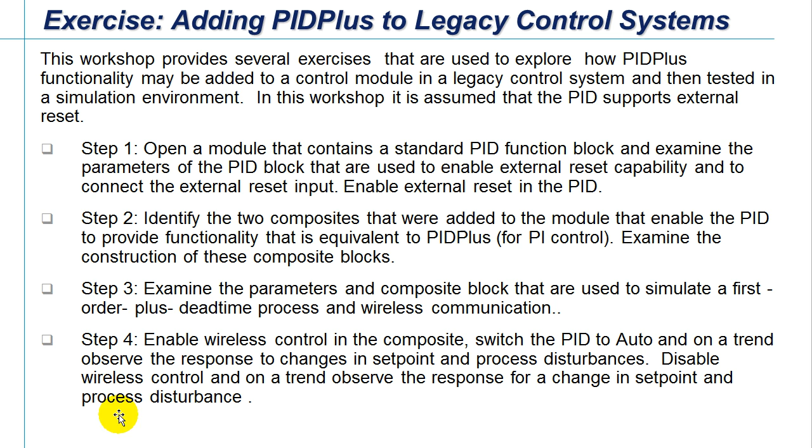In the first part of this exercise, we'll look at a module that contains our traditional PID for single loop control. We'll then identify the composites that are needed to be added to the control module to provide PIDPlus capability. We'll then examine some composite blocks that are used to simulate the process so that we can test this. And then we'll enable wireless control and introduce both set point and disturbance changes to demonstrate the control using PIDPlus implemented in this way.

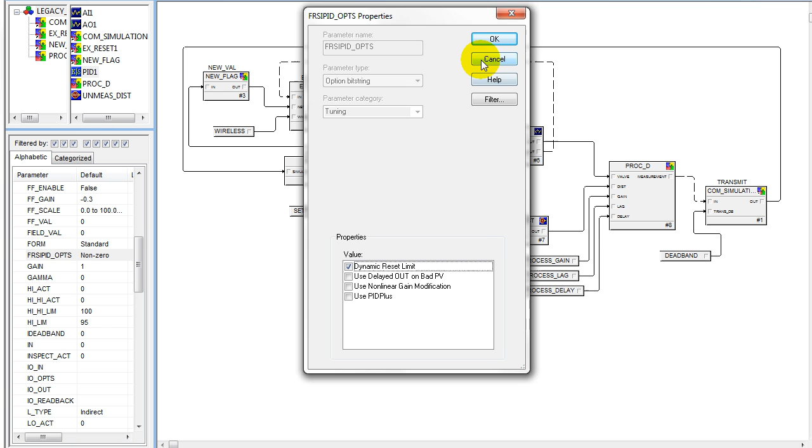Here is the module that we'll be using. As you notice, we have an input-output and a traditional PID in the control module. The input, though, in this case is being provided by a wireless transmitter. We're simulating that wireless measurement to demonstrate wireless control. The PID in this case is set up where there's a parameter called dynamic reset limiting, which is used to enable external reset. And so in this case we've enabled external reset, and the input coming in on BKCAL_IN then is used in the positive feedback network that is used to calculate the reset component.

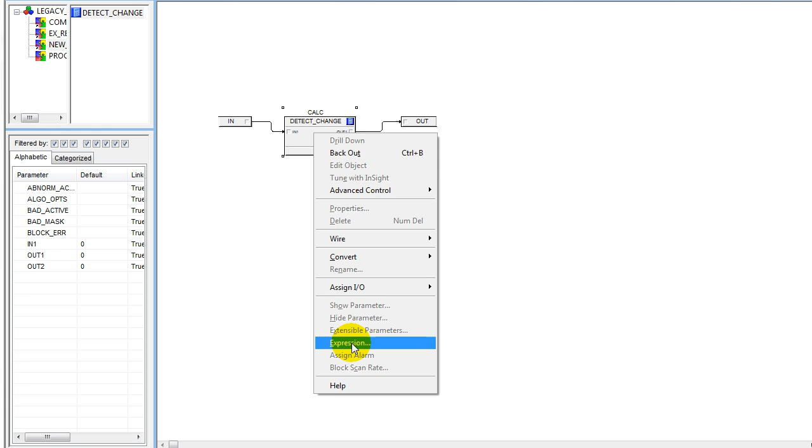The implementation of PIDPlus are two composites. The first is used to just detect a change in the wireless measurement, and so you see here that we're providing an output of 0, 1 based upon whether a new measurement has been received. That new measurement flag is then used in a second composite that is acting upon the normal input that would be provided to the BKCAL_IN.

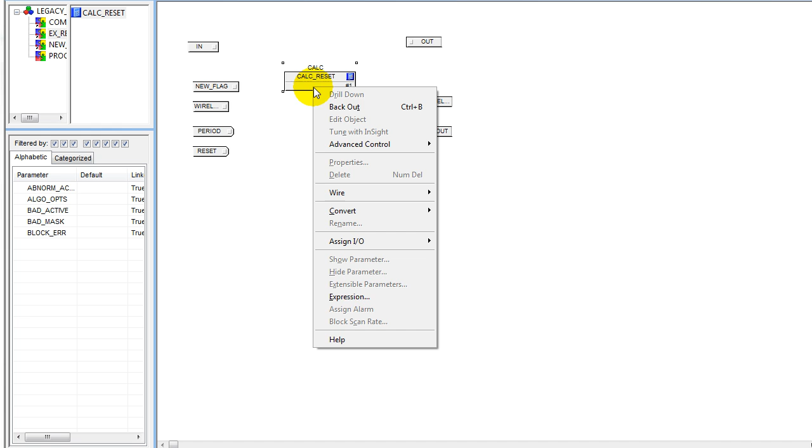When wireless is enabled, then we are going to be doing a calculation of the filter in the positive feedback network. In the first part of this calculation, we'll be looking at whether wireless is enabled. If it is, then the reset of the PID is set to 0. If it is not enabled, then the normal reset is in the PID.

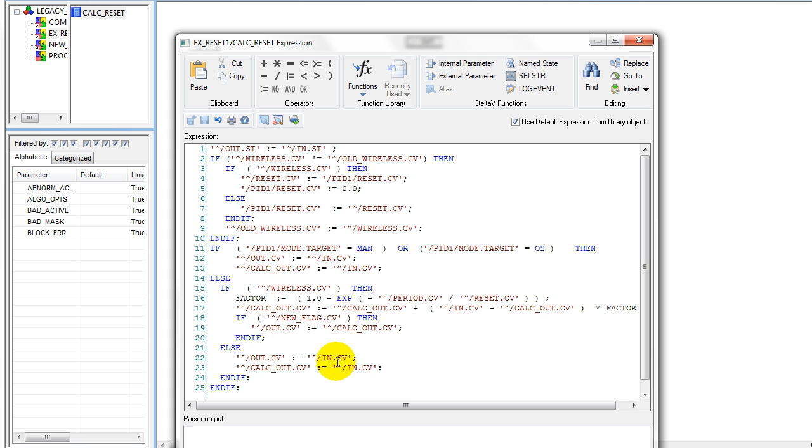When wireless is enabled, then we'll be calculating a filter, and that will be based upon the reset time. And when we get a new measurement, then we will actually use the filter output as the value provided in the positive feedback network. Otherwise, it is maintained at its last value. And so you see the implementation of this calculation is quite straightforward and can be implemented on most DCS systems. The combination of these two composites provide us our value that we're going to use in our positive feedback network that creates the reset.

To demonstrate this capability, we've created a process simulation, and you notice that in the process simulation, the process has a dead time of 2 seconds, a gain of 1, and a response time of 6 seconds. And so our reset then is set to 8, that is the time constant of our process plus the dead time, and the gain is set to 1. So we're tuning the control for a lambda factor of 1.

The communication is wireless communication with a deadband of 1%, a period of 16, and a default time of 32 seconds. Here we've enabled online operation then of this module with the simulation.

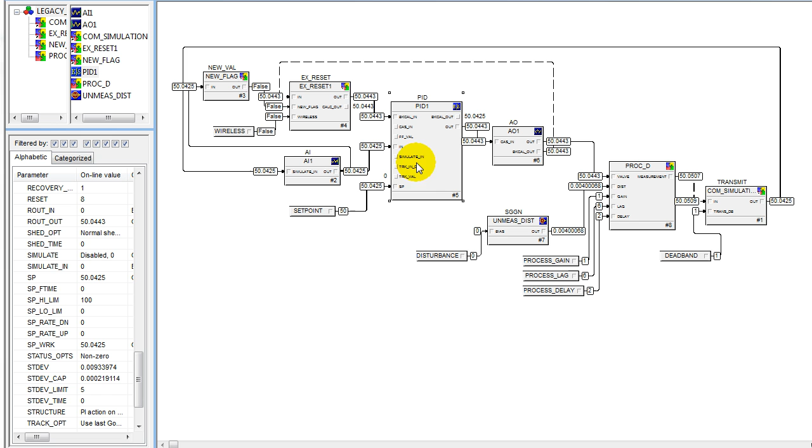In this particular case then we have the PID initially set up where the PID mode is set to manual, and so it's just maintaining its output. If we examine then the PID, its reset is 8 seconds, so that is the tuning of it.

When we enable, though, wireless control, that is, we're enabling the composite now to be doing its calculation of the filter. The reset of the PID is automatically set to 0, and the calculation of our filter is then based upon the reset which has been captured within the composite. So it's using the 8-second reset time in its filter calculation. And so that then is being used.

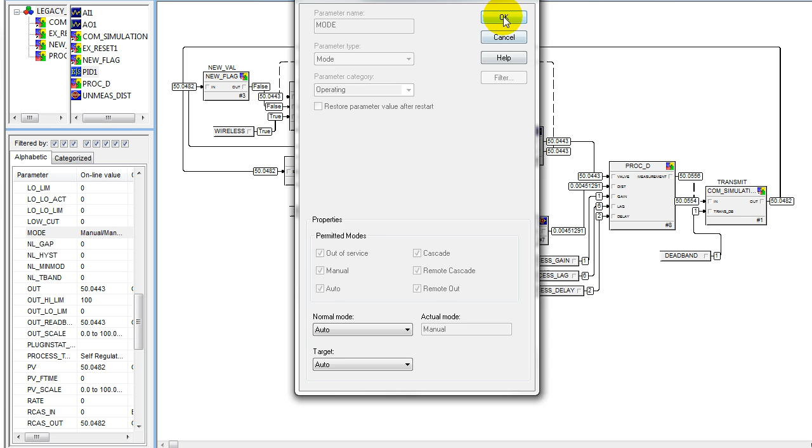So to demonstrate this capability, we'll turn our PID to automatic control, and we'll introduce a 10% set point change. As we introduce the set point change, you notice that the output of our PID immediately responds to that set point change. That change in valve position then is impacting our measurement, but we don't see that immediately due to the wireless communication. So that's only being updated every 16 seconds.

When we look at the trend, then we notice that the valve changes for a set point change, but our measurement only changes every 16 seconds for a large change in measurement. And once the measurement gets close to our set point, within 1%, then the actual value is only updated every 32 seconds. So when the change in value is less than 1%, then we only update and communicate the new value every 32 seconds.

When we do get a new communication, you notice we're very close to set point here. And then over time we get exactly to set point using wireless communications.

To demonstrate the response for a disturbance change, we'll introduce a 10% disturbance into our process simulation. In response to that disturbance, our process starts to immediately respond, but we don't see that response immediately due to the wireless communication. So only when we see the new measurement do we then sense that a disturbance has occurred. But when we do sense the disturbance has occurred, then we take immediate response in our PID.

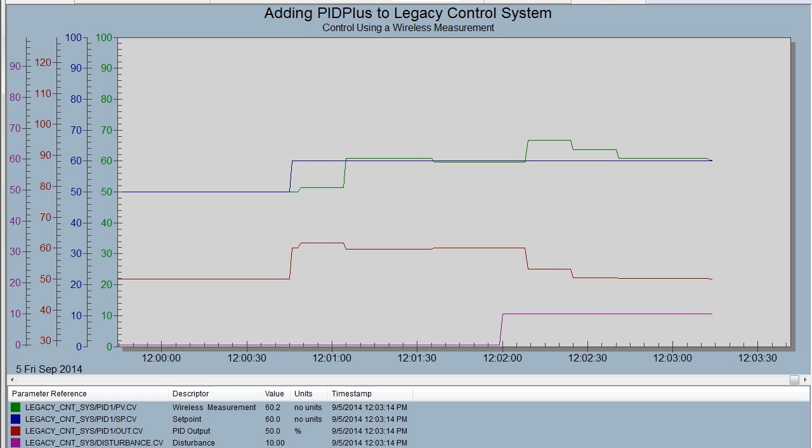In the windowed communication, then we only update every 16 seconds. If we're within 1%, we only update every 32 seconds. And so with window communication, you're using very few new measurement updates, and yet you notice we're able to do a very effective job both on set point change and disturbance change in terms of control performance.

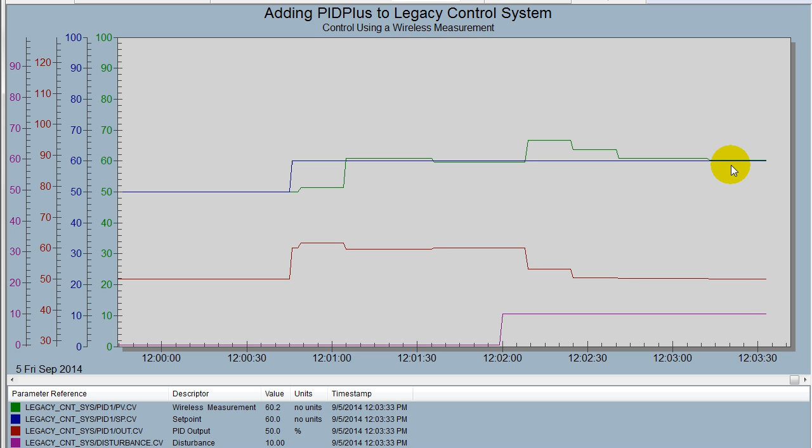So we hope this demonstration has been helpful in terms of you seeing how it is possible in a traditional control system to implement PIDPlus. Basically, we implemented two composites and used the capability of the PID to support external reset. So as long as your PID supports external reset, you can build the filter outside of the PID. You can then use the normal reset in the filter calculation.

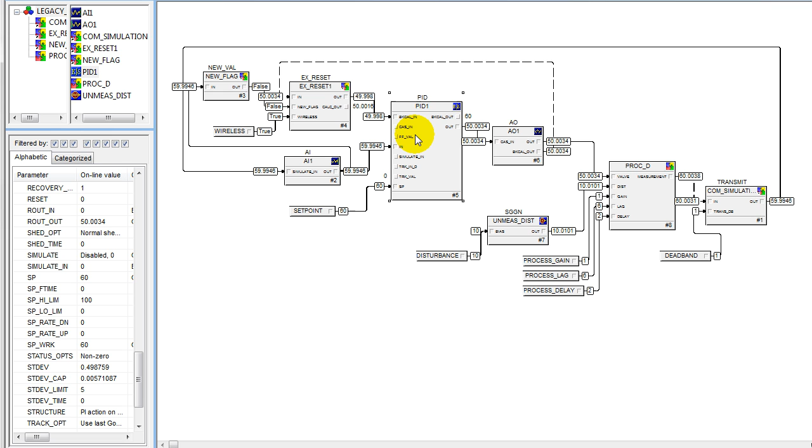In implementing this, it's important to train an instrument technician on the fact that the PID reset will be set to 0, and that tuning of his control is set through this composite. The tuning is only based upon the process dynamics and is totally independent of the update and sample time, as has been demonstrated in this workshop.